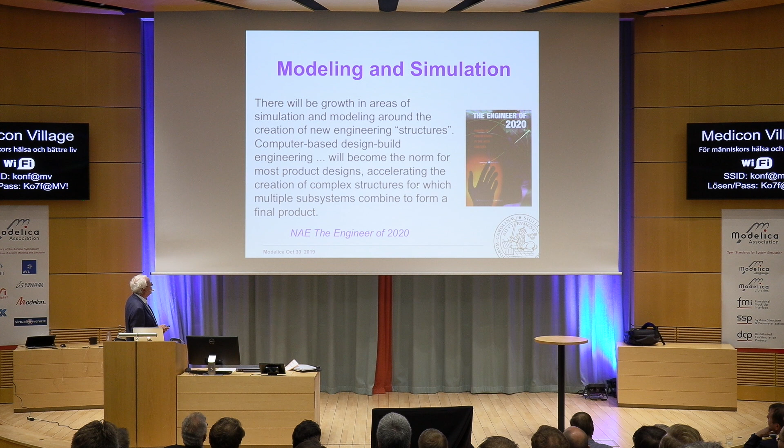Another way to view it is this slide, which is coming from the National Academy of Engineering in the US. And they say that there will be growth in the areas of simulation and modeling around the creation of new engineering structures. Computer-based design-build engineering will become the norm for most product designs, accelerating the creation of complex structures for which multiple subsystems combine. So this was a study they made when they were discussing what engineering was going to look like in the year 2020. That means next year.

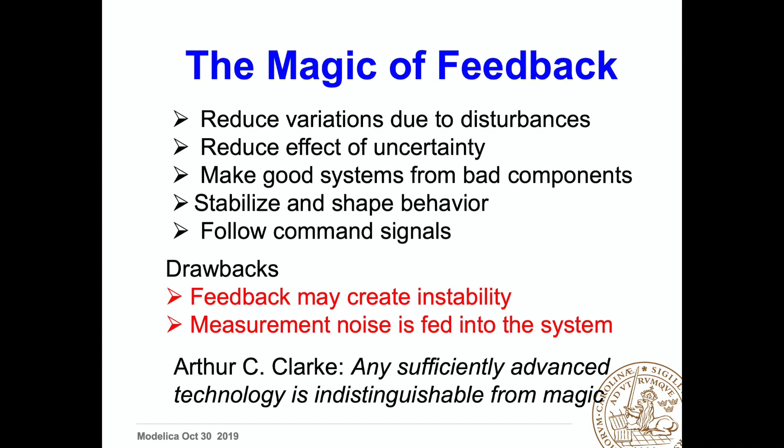From a control point of view, I call it the magic of feedback. Because feedback can do amazing things. We can reduce variations to disturbances. You know, when the car hits a hill, goes upwards, it goes slower, so then the control system fixes that. We can reduce the effect of uncertainty. We can actually make good systems out of bad components. We can also stabilize and shape behavior. We can make a system follow command signals. So these are some amazingly good qualities, and that's why control is so widespread.

Of course, there are drawbacks. Number one, whenever you close a feedback loop, you may run into instability. And that's why stability theory has been such an important part. The other thing is whenever you're feeding a measured signal into a system, you're feeding in measurement noise. So you have to make sure that that is not so much. And here I have a little support by one of my favorite authors, Arthur C. Clarke. You know, he writes science fiction. He says that any sufficiently advanced technology is indistinguishable from magic. And therefore, I think it's justified to call it the magic of feedback.

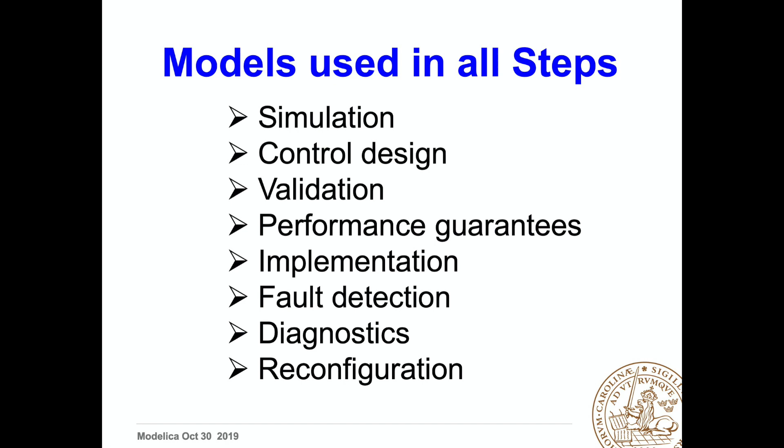Now, when we do control, models are used in all the steps. They're used when we are simulating, when we're doing control design, when we do validation, when we deliver performance guarantees, when we implement, when we do fault detection, we do diagnostics to do reconfiguration. So modeling is a real essential part of our lives.

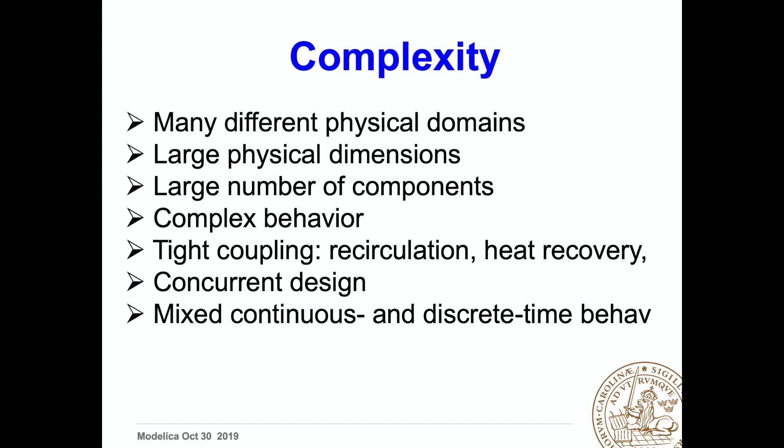Unfortunately, the real world is complex. We have many different physical domains. As a control engineer, you may work in something with chemicals, you may work in something with mechanical, you will work in something with electrical. So we have a very large physical domain to operate in. And also, there are often large physical dimensions. There can also be very small physical dimensions. We go all the range from nano to giga in control. And then systems have a pretty complex behavior. And it's getting more and more complex as you try to save things, as you do recirculation, etc.

It's a big difference when you're designing a process from scratch together with a control system, and when you're presented with a system, and then you say, please control this. So there's a tremendous advantage to do concurrent design. And of course, we have mixtures between continuous and discrete systems.

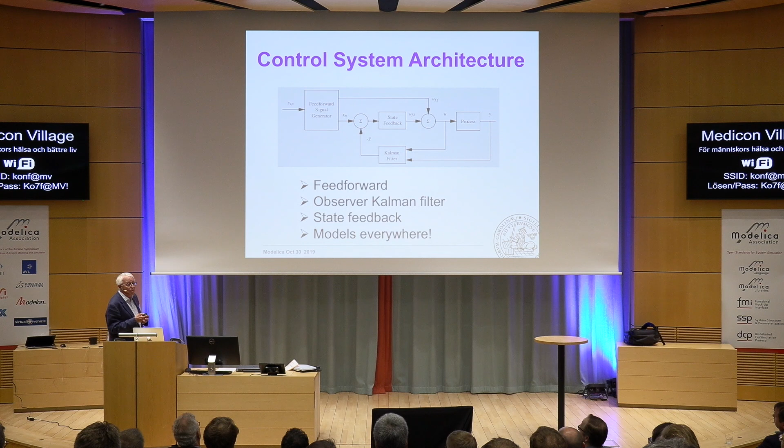In here, there are models. And we also have to generate this one, we have to have inverse models. In here, when we do the filter, in here is a dynamical model of the system and its environment. And also when we compute the design here, there are models inherently when we're computing design. So models are really a part of our lives. The way we deal with this is that we use computing.

I had the pleasure of working for IBM for 5 years, and I was part of the time in the math department in Yorktown Heights. And we had a great guy called Herman Goldstine. He actually built one of the first computers together with John von Neumann when he was in the army. At one of the staff meetings, he said the following: when things change by 2 orders of magnitude, it is revolution, not evolution. So when you can do things 100 times better, that's something drastic happening.

You compare this with Gordon Moore's law, which is no longer valid, you find that in computers you have a revolution every 10 years. So roughly every 10 years, computers became 100 times faster. And this happened for about 50 years. This has not translated into engineering productivity. We have not become 100 times more efficient in 10 years, and 10 to the 4 times more efficient in 20 years. And the reason for that is that algorithms and software have not delivered corresponding advances.

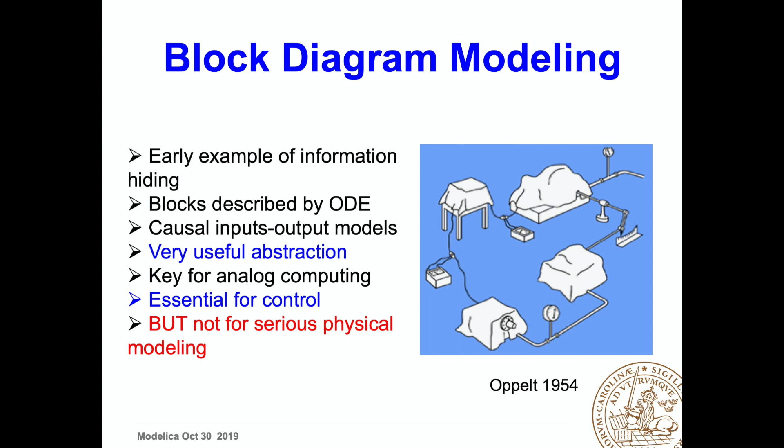He said, we don't care about what's inside the boxes in here. We just care, here's a signal coming in, here's a signal coming out. And then you draw these little squares, you get a block diagram. So this is the traditional block diagram modeling, which is tremendously useful. To describe ordinary differential equations, there are causal inputs and outputs, and it's a very useful abstraction. It's the key for analog computing. It's essential for control, but not for serious physical modeling.

I thought I had a slide for that. And the reason for the physical modeling is that if you take 2 capacitors and connect them, you get a spark, and then the capacitors have the same voltage. So then 2 states disappear. The same if you have rotating mechanics, you have 4 states, angular velocity and position. You connect the 2 together, you get scratches, and then they rotate with the same speed. So states disappear when you connect physical systems. The other thing is that you can't combine systems one after the other when you do it.

So analog computing was based on that. You were solving differential equations, and Bush did it first with mechanical, then we got electrical computing, and you create a feedback loop. So here is a nonlinear function and integrator, and then you get a feedback loop and you solve it. And if you close a loop without having an integrator, you get an algebraic loop. So the analog computer started to tweak, started to whistle.

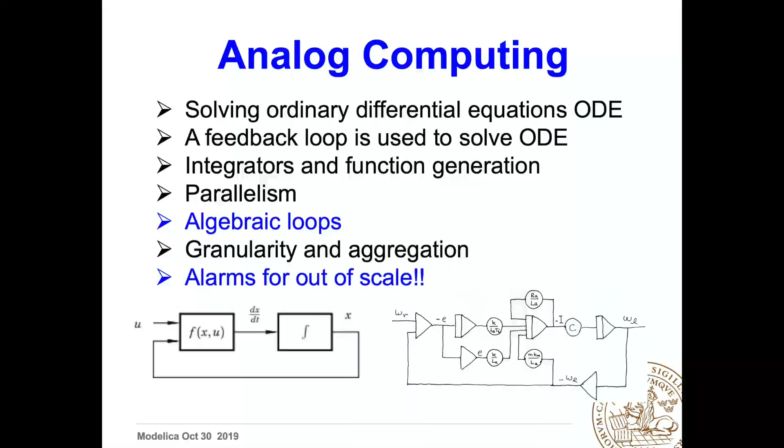And there was another thing. When you have the physical devices, they operated typically on plus minus 100 volts or plus minus 300 volts. When they got out of range, you get an alarm signal, so you know that something is wrong with your model. And there have been many versions of this, and I would say that Simulink is the ultimate block diagram tool. It mimics analog computing. Each block is a state, and you have MATLAB and Stateflow. You have granularity and structuring by essentially doing graphical things.

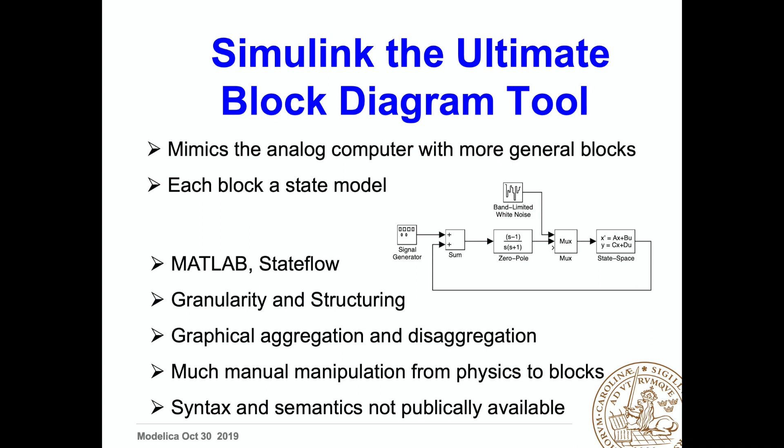On the other hand, you need to do much manual manipulation to go from physics to blocks, and also syntax and semantics are not available. And here comes the reason why this is not good. So here you have the story about the 2 capacitors. And then if you model a tank like this with a block, and then you connect 2 tanks, it doesn't map like this, because the behavior of this tank depends very much on the pressure here, which depends on what this tank is. So if you model this as a block, this is not 2 blocks in the world.

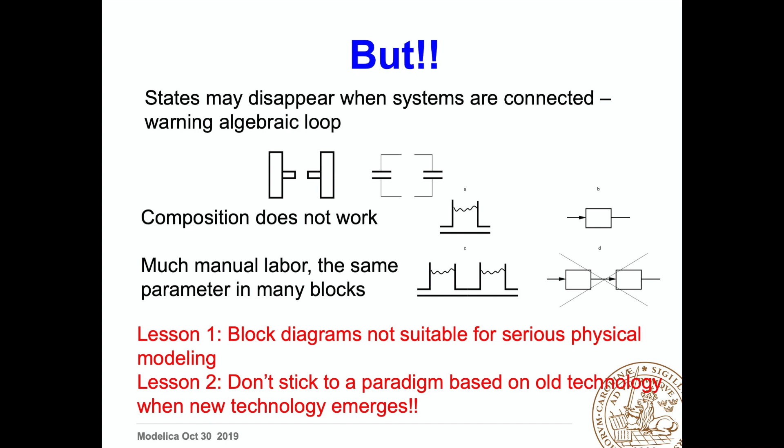So number 1, that's why I'm saying that block diagrams are not suitable for serious physical modeling. Or in other words, this paradigm came from analog computing. And now when you get digital computers, you should not necessarily stick to an old paradigm when you get a new thing. So I'll tell you a little bit how Modelica emerged. And first I give you a slide.

Here are some modeling tools. And the civil engineers were first out, around 1956; they started to do structural dynamics. Chemical engineers came a little bit later, 8 years later, at Imperial College. I'm very glad that Pantelides is here, because he was part of that group when they did the first simulators for chemical engineering. Electronics was pretty early, about the same time, with IBM and also with Berkeley.

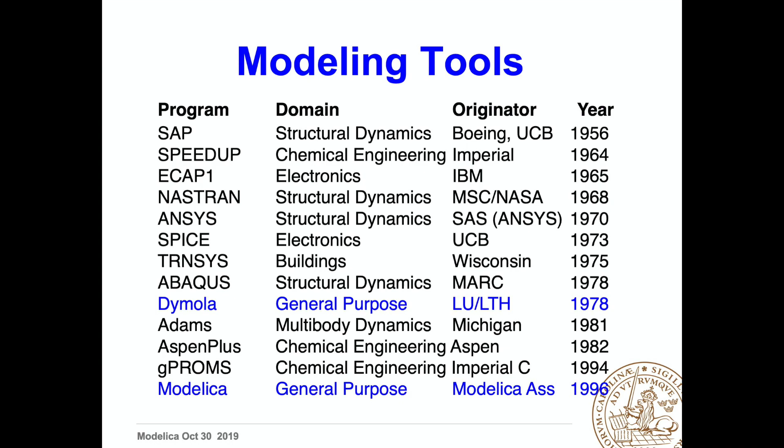And then you get more structural dynamics, you get more electronics. Building simulators came out around 1975. And Dymola came out in 78. And this was the first general purpose modeling language. They were cutting across several different disciplines. I'll talk more about this. And then later on, you see, there were more things coming up. And in 1996, we got Modelica.

So then, since we were part of this, I have to tell you about Lund Institute of Technology in the 70s. I became professor there in 1965, after spending 5 years at IBM. So I came to a new department in an old university, and we started a research program in control. We did optimization, computer control, system identification, adaptive control.

And I also said, that was something I learned at IBM, we should at all times have an honest application in the group. And what do I mean by an honest application? Well, it's something that comes from outside, from industry. It's something where you have deadlines and something where you have to deliver. And that gives a very healthy atmosphere in a research group. The people are flying up with the ideas, and then you have some people who are really trying to solve a real, genuine problem with outside interest.

So we very quickly figured out that to solve control problems, we had to do a lot of modeling. And also, in order to work efficiently with industry, we needed to develop tools. So we developed a string of tools. We had toolboxes; this was an interactive box for doing control system design, for doing system identification. One of our PhDs was Lennart Ljung. This later grew into the MATLAB system identification toolbox. We had model transformation things. They were all written in Fortran, and they were distributed to industry.

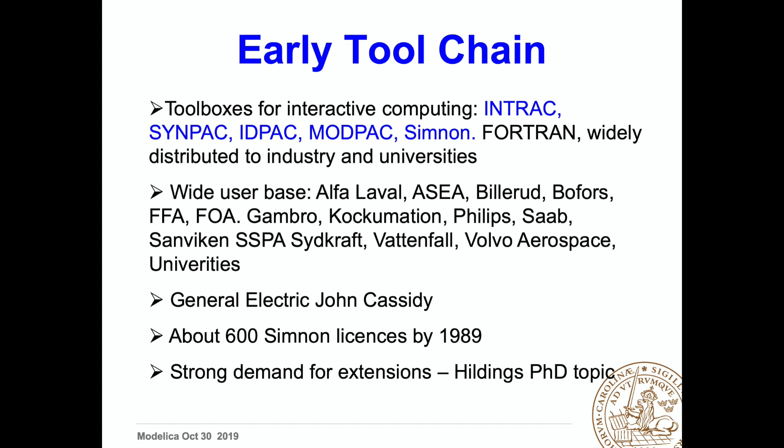There was one thing that was missing, and that was a nonlinear simulator. So I got a nice, smart master student, Hilding Elmqvist. And he wrote a nice digital emulator of an analog computer. And there are two things. Number one, with the programs at that time, if you change a parameter, you had to recompile. And that took a lot of time in these days. So number one, we wanted to change parameters without having to do recompilation. Secondly, we wanted to have it interactive.

And we had one thing I was insisting on. I tried very hard to get our own computer in the department. And we had a fantastic rector at the time when I joined there. A great academic leader. He was the rector of KTH. So I had lots of money, and they had lots of stuff to buy. I didn't want to have anything. So I went up to him: I would like to buy a computer. And he said, that might be troublesome, but let me think about this. Come back in a week. Then he said, in the current rules, we can't do it. Can't you call it something else?

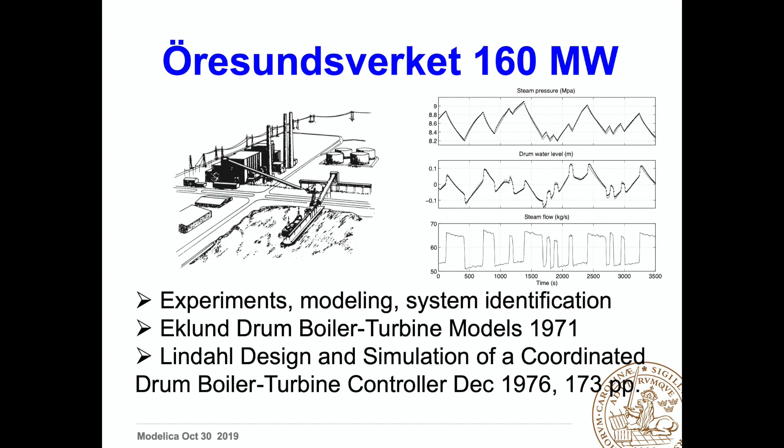And we did lots of experiments on this. We were putting in perturbation signals and measuring all the variables. So we had some very good models of this. And here is one model, the final model, written by a guy named Sture Lindahl. It's about 173 pages. A very detailed model, which was very useful. So that was something we had as a model to do it.

We tried several things. One of the first things we tried for modeling and abstraction was bond graphs, invented by Hank Paynter. And then we discovered that bond graphs are nice if you have only one essential balance, for example, an energy balance. But if you are doing thermofluid systems where you have to take care of mass balances and momentum balances, you end up with a horrible mess. You had 3 sheets for each balance, and then you have threads going between them. So we decided that it was useless for serious physical modeling. Perfect if you can capture everything with an energy balance.

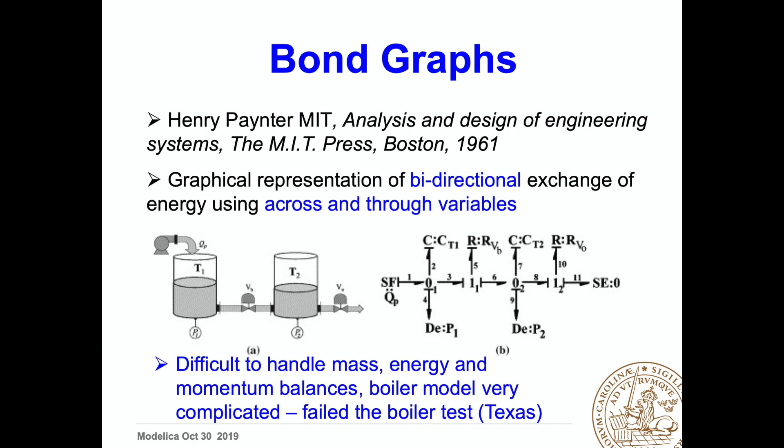And I had a nice verification of this when I was on sabbatical in Texas, because in Texas they had 3 of Paynter's students there. So I challenged them with our model and said, could you describe this in bond graphs? And they admitted, bond graphs are not suitable for this.

Another thing was electronics, where you have multi-port systems. And Berkeley had a simulator for that around 1970, which has many nice things. And the nice thing is that they were working with equations. And also, this became an IEEE milestone in 2011. So IEEE decided that this simulation program was so important for the electronics industry, they made it a milestone.

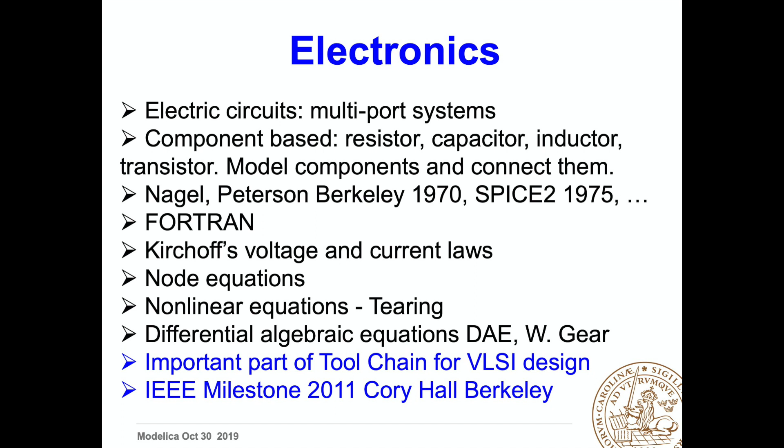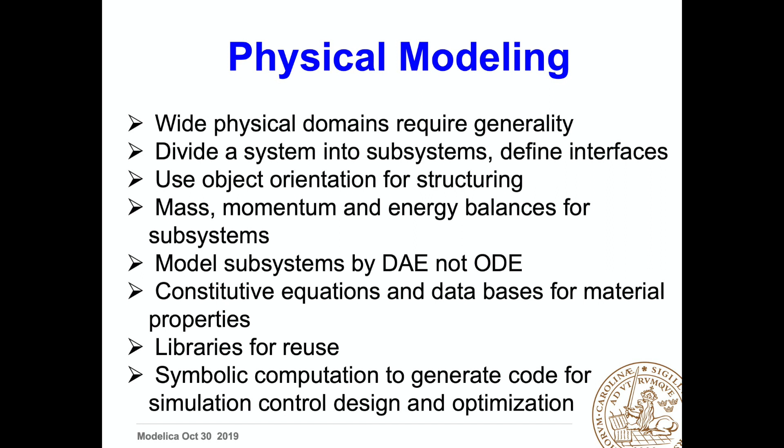So then what is physical modeling? Well, you have to cover wide physical domains. We have to divide the system into subsystems and define interfaces. We use object orientation for structuring, and then we write down mass, momentum, and energy balances for subsystems. We describe systems by differential algebraic equations, not ODEs. We have constitutive equations and databases for material properties. We have libraries for reuse. We do a lot of symbolic computation. And I'm so glad that I will meet Pantelides today, because they were the group who really pioneered symbolic computations.

So the question was that Hilding had done a very nice master thesis. What should he do? There were lots of demands; a drawback was that we only had real variables. So many people wanted to have vectors and stuff like this. There were lots of demands for this. So Hilding and I were sitting and talking and said, well, we could do this, but the perspiration factor is too high. The ratio between perspiration and inspiration is too high. So what should we do?

Well, we knew that modeling was a key issue for us in control. So we ended up saying, why don't you start to look seriously at the problem of modeling physical systems? And that was the part of Hilding's dissertation. He had the inspiration from electrical systems, from chemical engineering, from multibody.

And so he wrote the first, called Dymola. It was based on object orientation. He used a Norwegian program called Simula. That was at the time the only object-oriented program that was available. And I said, Hilding, I won't pass your thesis unless you can compile the boiler model. So he could play around and do many things, but he had to compile the boiler model. And of course, he did this, and I think he compressed this into about 11 or 12 pages.

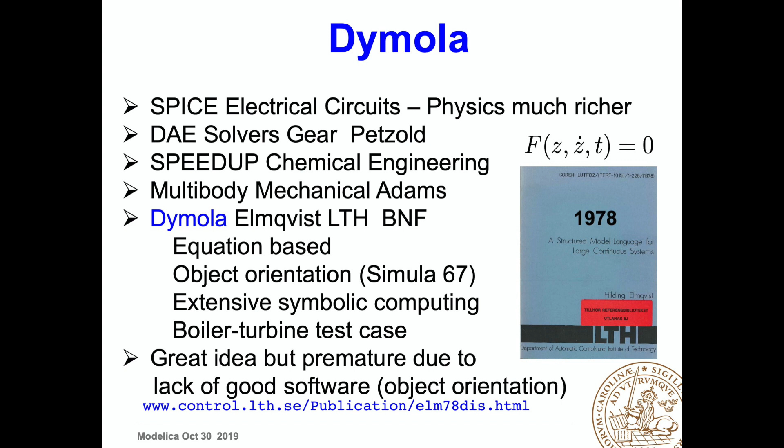And the power system company was so interested. This is a very interesting way of documenting a fairly complicated system. So we got a lot of credit. Now here's Hilding's thesis. I have a copy with me in case anybody here would like to take a look at it. So it was a great idea, but it was premature due to lack of software.

Simula was not widely used industrially. Later on, they got the Turing Prize in computer science for doing Simula. But at the time, it was not used in industry. So we said that this is too early. It's a good idea, but it's premature. Well,

we had this program, Computer-Aided Control Engineering. So in around 1990, we started a new project called Object-Oriented Modeling and Simulation. And Sven-Erik Mattsson was one of the key drivers, and Dag Brück, who is present here, was a key actor in this. So we had a group in the department of about 5-6 people who were doing this.

We did experimentation in Lisp, which had very nice object orientation. And then we had C++. And they developed a language called Omola, Object-Oriented Modeling Language, and Object-Oriented Simulation. And there was a lot of symbolic manipulations, index reduction. And Sven-Erik, he did a thesis on control of wind turbines later on.

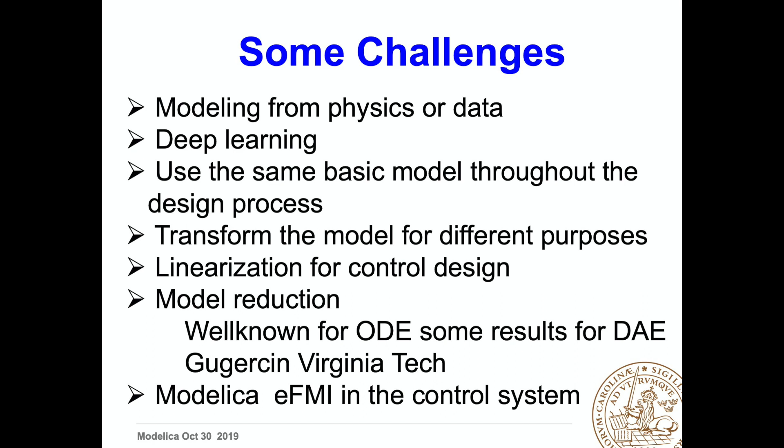Now we'll talk about some challenges. First of all, modeling from physics and modeling from data. I think in a certain sense they go hand in hand. But right now there's a lot of hype about deep learning. People believe that by throwing something into an AI program, you can get out anything you want. And my own feeling is very strongly: use physics whenever you can, because physics is stable and it's going to sit there for a long time. And then, of course, you have to combine this with measurements and other things. And I don't have time to show you this. Oh.

Yeah, so we should also use the same physical model throughout the design process. We should transform the model for different purposes. We should linearize for control design. And here's an area that I think is worth looking into: model reduction. It's very well known for ordinary differential equations. There are some results essentially coming from Virginia Tech in the US for differential algebraic equations.

Another thing, I think we should have Modelica online in the loops. And there will be sessions here today about the eFMI, which is a convenient way to... the FMIs are a little bit restricted now, but an extended version of the FMIs would be very suited to put into the control systems.

So then we look at control systems architecture, which I had before. This was the diagram we had with a feed-forward signal generator, the Kalman filter, and the state feedback. So for feed-forward, you use an inverse model. And I know that Martin Otter has been using this in connection with flight control, and there are other Modelica applications. But that's a nice thing about Modelica. If you have a model, you can just reverse causality, and you can get the inverse model.

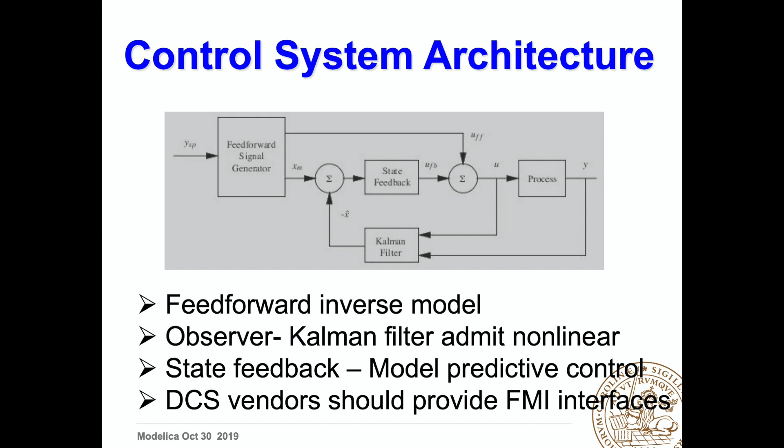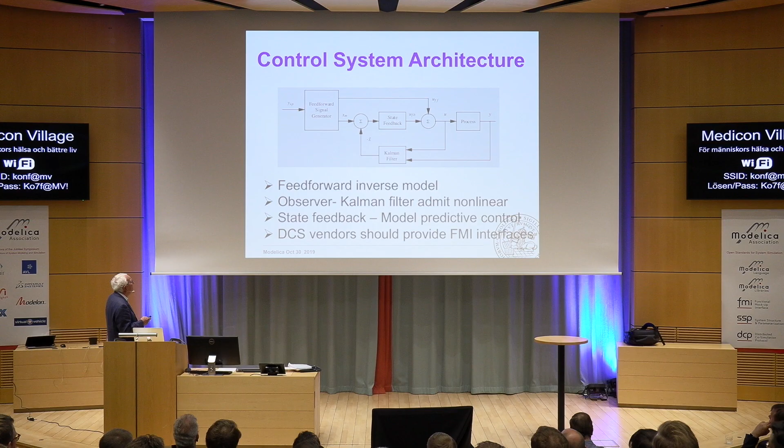And then, of course, we have to learn the mathematics. So I think what we have to do in here is that we have to educate people who are very good in one of these areas and also know enough about these interfaces here so that they can effectively communicate with other people to do the things.

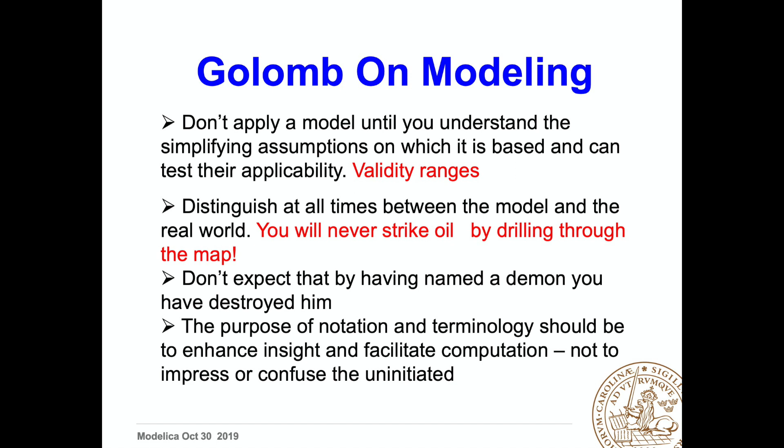Don't apply a model until you understand the simplifying assumptions on which it's based and test their applicability, call this validity ranges. And then distinguish at all times between the model and the real world. You will never strike oil by drilling through the map. And then don't expect that by having named a demon, you have destroyed him. When they say singularity, bad condition, etc. So there are some real problems you cannot avoid. And then this is something I like. The purpose of notation and terminology should be to enhance insight and facilitate computation, not to impress or confuse the uninitiated.

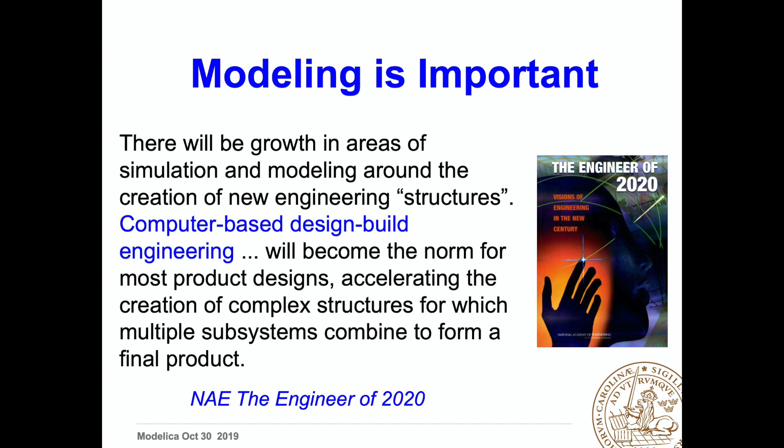So it's not over yet. So let me just finish by showing you this model, so that we are not alone to think that modeling is important. And here's my final words to the Modelica community. I think you have done a terrific thing. You have brought Modelica to something that is close to becoming an international standard. I think there's more to do, but you have come a good way.

And one thing I would like to see is, for example, to develop symbolic tools for model reduction, both by using symbolic and numeric computations. And then I think that you should initiate a discussion to put eFMIs in the distributed control systems. There are many people putting DCS out there, and I think it would not be fantastically hard work to persuade them to put eFMIs in their systems. So if you do this, whatever you have done would be even greater.